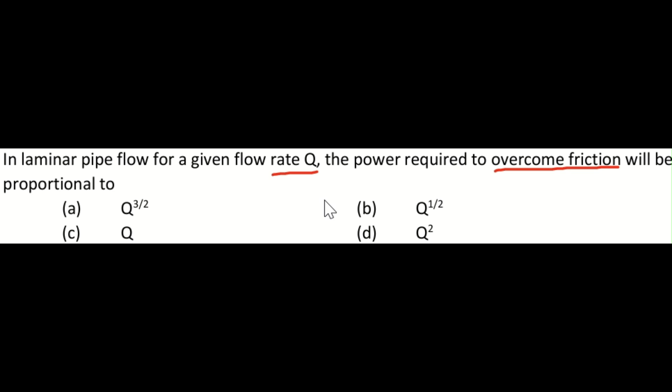So delta P is the pressure drop and mu is the dynamic viscosity of the fluid. L is the length of the pipe in which the fluid is flowing and R is the pipe radius. And obviously Q is the volumetric flow rate. So if we know all these values, we can formulate the Hagen-Poiseuille equation, that is delta P equal to 8 mu L Q by pi R raised to 4.

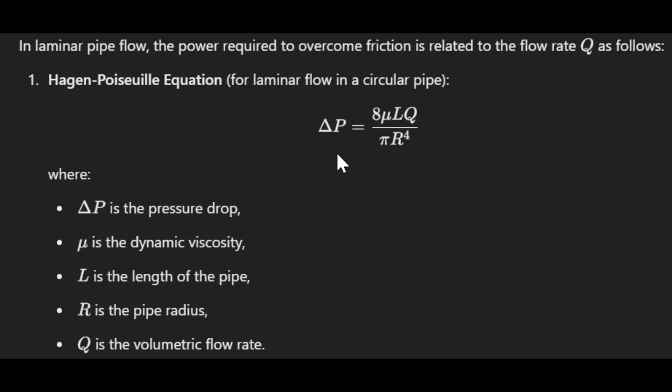But we have to determine the power required to overcome friction. So that is formulated by using this equation. Now to find the power required to overcome friction, what you have to do is just multiply the pressure drop in the pipe with the flow rate. Okay, so if you multiply the pressure drop in the pipe with the flow rate, you would get the power required to overcome friction. You will get a particular value.

Then you have to apply power more than that. So power required to overcome friction is that much. Okay, so substituting that, you get from the option it is a Q term, right? So we have two Q's, so it will be Q square. So power required to overcome friction will be directly proportional to Q square. So the answer is Q square.

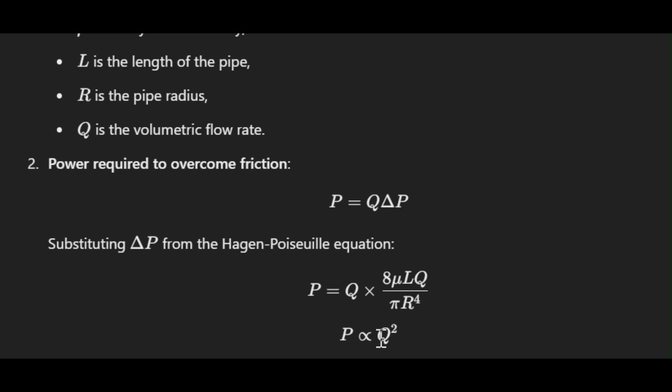Which of the following is a formula for the friction factor of circular pipes in laminar flow? So the formula of the friction factor in a circular pipe having laminar flow, which among these is the option? So for a laminar flow, the friction factor is 64 by Re. Re is the Reynolds number, and this equation is derived from Hagen-Poiseuille's equation or Hagen-Poiseuille flow, which we discussed in the previous question. So the friction factor for circular pipes having laminar flow should have the value 64 by Re.

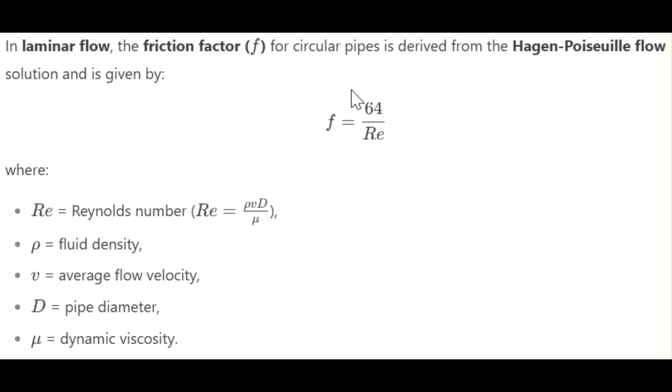Re is simply the Reynolds number, and the equation for Reynolds number is rho v d by mu. This rho is the fluid density, I mean the fluid which is used for motion, and then v is the flow velocity, the velocity at which the fluid is moving. d is the circular pipe's diameter, mu is the dynamic viscosity of the fluid. So for laminar flow in circular pipes, the friction factor should be 64 by Re.

For a pipe of uniform cross section, slope of HGL will be. So you have four options. It is compared to EGL, energy gradient line. So with respect to the slope of the hydraulic gradient line, what will be the EGL? Okay. So this is the definition of hydraulic gradient line and energy gradient line.

Hydraulic gradient line, it's the sum of pressure head and datum head of a fluid flowing through a pipe with respect to a particular line. So it's simply the sum of pressure head and datum head. In the case of energy gradient line, there's an additional term that is velocity head. The other two terms are just like the hydraulic gradient line. So this is the sum of the pressure head, velocity head, and datum head of a fluid flowing through a pipe.

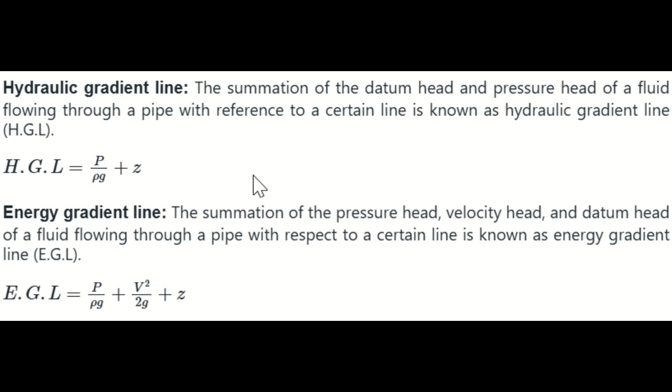You can consider both. I mean, elevation head is present for both the hydraulic gradient line and energy gradient line. Similarly, pressure head is also present for both hydraulic gradient line and energy gradient line. The only difference between these two is the velocity head present for the energy gradient line. But as mentioned in the question, we have a uniform cross-sectional pipe.

So obviously, when we have a uniform cross-sectional pipe, the velocity would be the same. For a uniform cross-section pipe, the velocity would be the same by the continuity equation. Okay, the area is the same, so the velocity should be the same. So velocity would be constant.

That means this v1 square by 2g and v2 square by 2g will be constant. So the slope of the hydraulic gradient line and energy gradient line would be equal. Okay, this could vary if the velocity at the inlet and velocity after varies; irrespective of the slope of the hydraulic gradient line, the energy gradient line slope could increase or decrease.

It could vary with respect to HGL. But since the velocity head is constant due to uniform cross section, we could say this energy gradient line and hydraulic gradient line have the same slope. So the answer is it is equal to the slope of the EGL line.

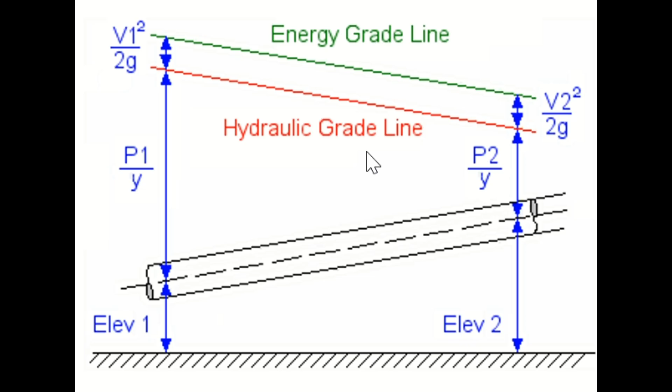For the stream function psi is equal to minus 8xy, the potential function is? So we have many options. For the potential function, we have given the stream function. So to solve this problem, we have to know the relation of u and v. We have stream function psi is equal to minus 8xy, and the relation is u is equal to minus dou psi by dou y, and v is equal to dou psi by dou x.

This has to be known, and from that I can write dou psi by dou y and dou psi by dou x. So u will be 8x and v is equal to minus 8y. And the relation of these velocity components u and v with the potential function phi is dou phi by dou x equal to minus u, and dou phi by dou y is equal to minus v.

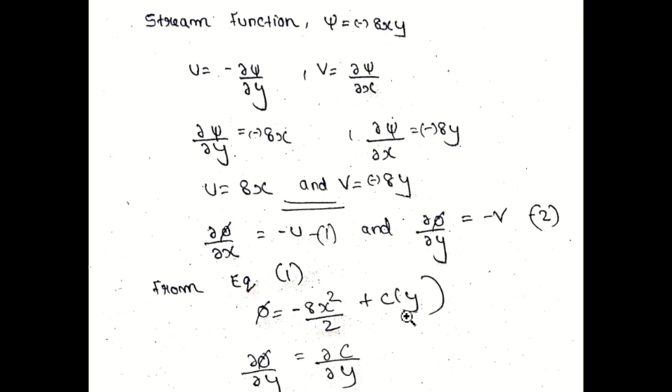So I'm taking equation number 1. Since it's a function of x, I'm integrating with respect to x. So there will be a constant due to integration. And since y is a constant here, I can write c as a function of y. So differentiating this term with respect to y, it will be dou phi by dou y, and it will be dou c by dou y, because here c, the constant of integration, is considered as a function of y. So I got one equation,

and I also integrate with respect to y from the main equation. So 8y square by 2 plus a function of x. So again, differentiating with respect to y, it will be dou phi by dou y and will be 8y. So I got two equations with the same LHS dou phi by dou y. So equating, we got dou c by dou y is equal to 8y. So if I integrate it, that constant of integration would be 4y square.

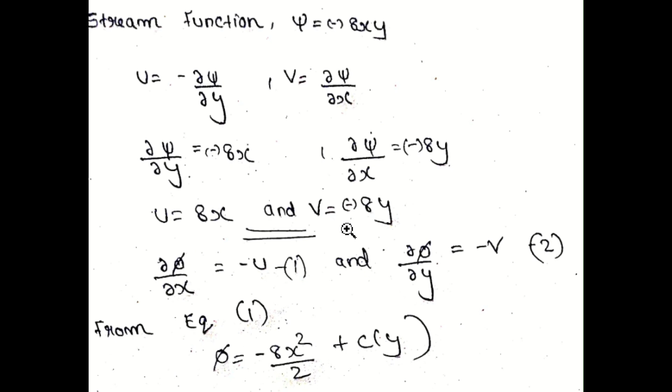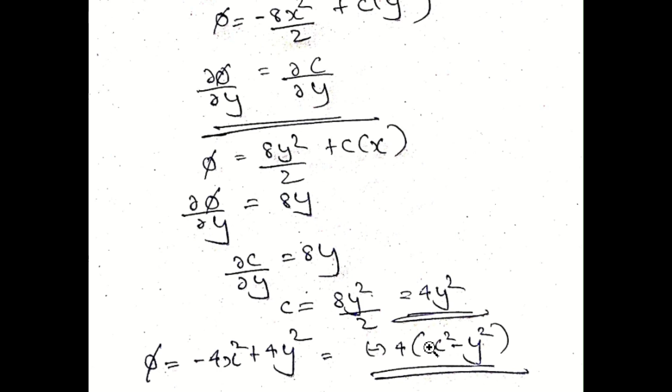So substituting into the actual equation, you get minus 4x square plus 4y square, and this can be written as minus 4 into x square minus y square. You can neglect the sign convention. Sometimes the option won't be the exact match of our answer. From the calculation it is minus 4 into x square minus y square, but the options are different. So neglecting the sign difference, from the options the answer is 4 into x square minus y square.

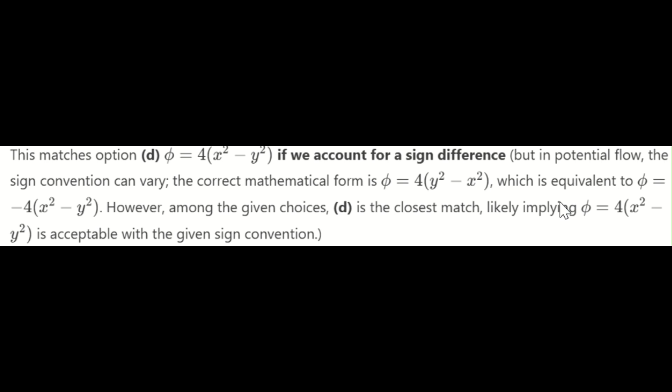What is a valid potential function? So we have given 4 options of different potential functions. So how do you define whether a potential function is valid or not? Okay, so how to solve this one?

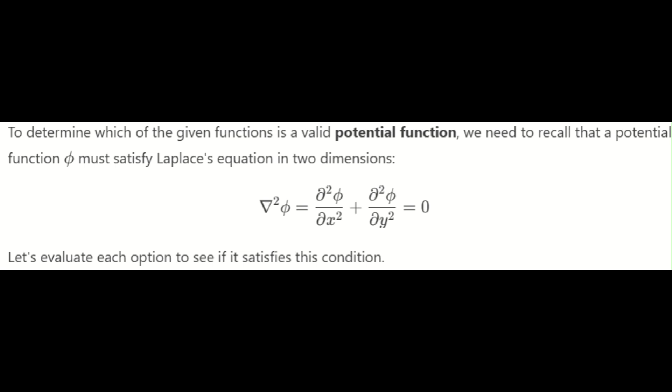So to check whether a potential function is valid or not: the potential function is represented by phi. To be valid, it has to satisfy the two-dimensional Laplace equation, that is dou square phi by dou x square plus dou square phi by dou y square is equal to 0. If any potential function satisfies this equation, then it can be said to be a valid potential function. If you check the first option, its sum will be 8, which is not equal to 0. So it does not satisfy the Laplace equation.

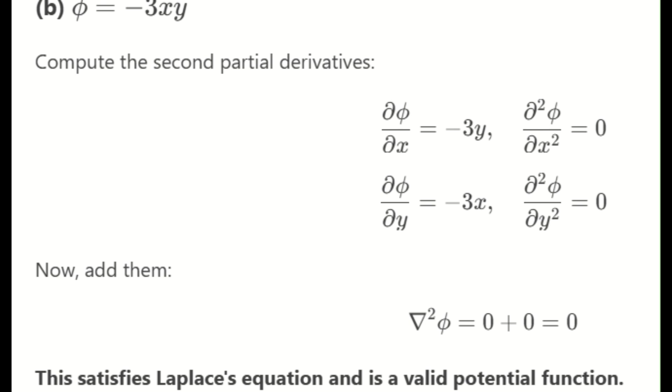So for option B, where phi is equal to minus 3xy, as you can see, it is a perfectly valid potential function and satisfies the given equation. So among these, a valid potential function is option B.

So in a steady flow along a straight line at a location, the velocity head is 5 meter, pressure head is 3 meter and potential head is 2 meter. The height of hydraulic gradient line, or the head of hydraulic gradient line, is? So we already know from the previous question what is the hydraulic gradient line. It is simply the sum of pressure head and datum head, or we can call potential head.

Okay, velocity head is only included in the total energy line or energy gradient line EGL, but for HGL or hydraulic gradient line, it is simply the sum of pressure head and potential head. So the answer will be 5 meter. So Bernoulli's equation is applicable for, we have 4 options. So which among these is the correct condition for Bernoulli equation?

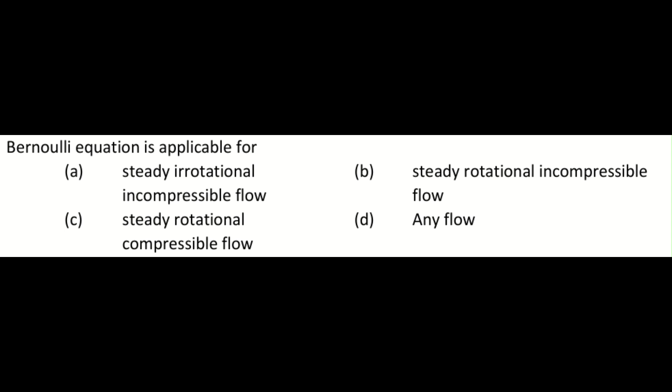So I will show you some of the conditions for Bernoulli's equation. So this is a condition for Bernoulli's equation. We all know what is Bernoulli's equation, the simplified form of energy equation, which is derived from the Euler's equation. So the standard Bernoulli's equation is applicable under these four conditions. So whenever you hear Bernoulli's equation, these four conditions have to be satisfied.

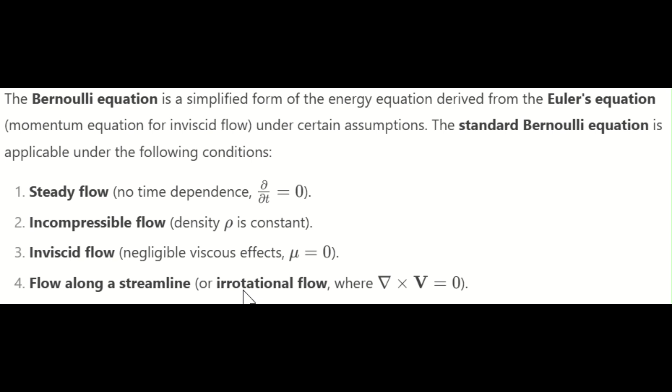Should be steady flow. Steady flow means it does not depend on time. Whatever factor is not changing with respect to time, that is steady flow. Incompressible flow means its density is constant. A varying density fluid means it's compressible. So incompressible, density is constant, and inviscid flow means it does not have any viscosity. Okay, it's completely zero viscous fluid, and flow along a streamline, or it is having irrotational flow. So among these, the answer is steady flow, irrotational, incompressible flow for Bernoulli's equation to satisfy.

A head of 300 meter of water is available in a hydroelectric plant. The discharge through the penstock pipe, the flow rate, is 200 liter per second. You have to find the maximum power that can be developed from this water. It is stored at a high head of 300 meter and having a discharge of 200 liter per second. And I can use g as acceleration due to gravity, and the answer is given in terms of g. So then how to solve this problem?

So this is the basic equation for the power developed. Suppose it is stored at a particular head and having discharge, and if we know the density of that fluid, here the fluid is water. Okay, they have mentioned water, so the power developed is eta rho g Q H. It is simply rho g Q H, but consider efficiency, because the power developed by the hydroelectric power plant won't be 100%. There would obviously be some loss, but in this question the efficiency is not mentioned, so the actual equation is simply P is equal to rho g Q H.

And assuming it to be 100% efficiency, we will get the answer as 60 kilowatt. But we don't have that in the options, and that is not possible to develop as maximum power. I mean, this is a case of 100% efficiency, then it's not possible. So if you apply simple logic and say there's loss, 50% efficiency, by that assumption the answer would be 30 kilowatt.

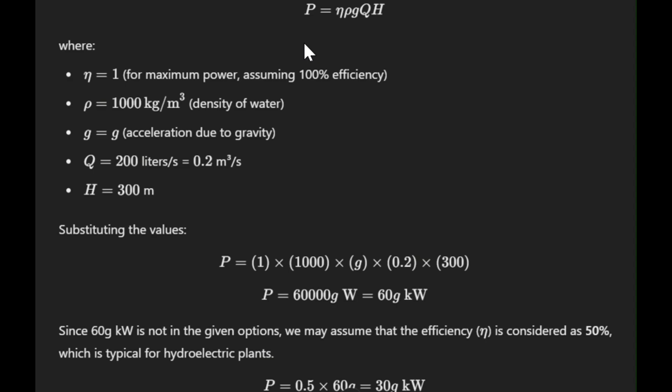In a laminar fully developed flow in a pipe, the ratio of average velocity to maximum velocity. Okay, that's a fact learned by analytic calculation. The ratio between the average velocity and the maximum velocity for a fully developed laminar flow is 1 by 2 or 0.5. That means, sorry, the average velocity will be half of the maximum velocity. Okay, that ratio is 0.5.